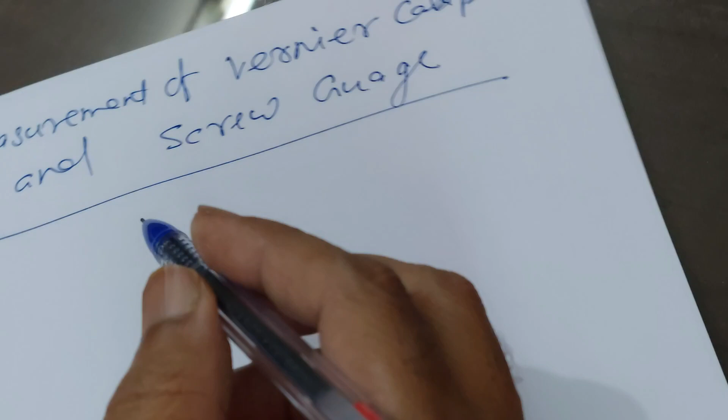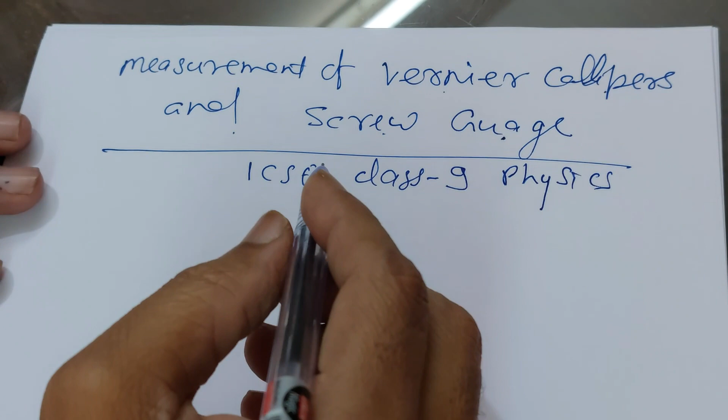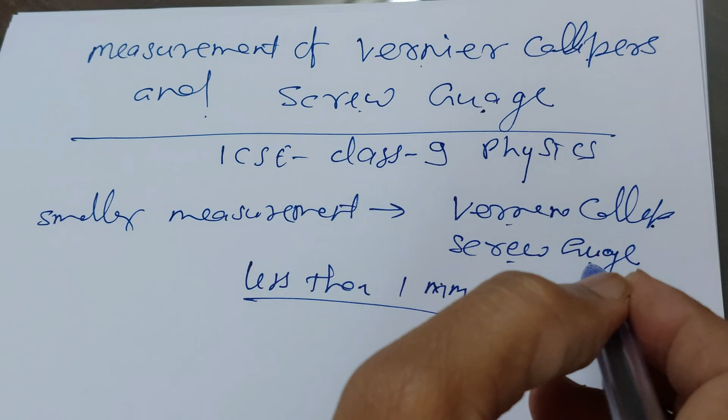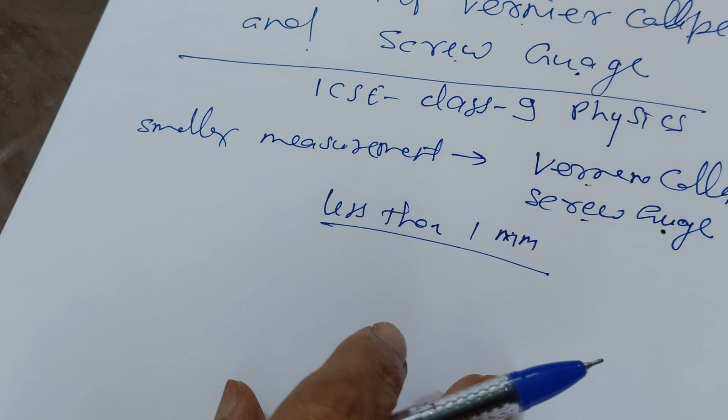Today the topic is measurement using vernier calipers and screw gauge for ICSE class 9 physics, chapter first. We know that we can only measure long distances with simple devices. To find out smaller measurements, we need devices known as vernier calipers and screw gauge. These are two devices to find out measurements smaller than 1 millimeter. So the smallest value can be determined by the vernier calipers and screw gauge, and the larger value can be determined by simple meter, hectometer, kilometer and so on. So first we start with vernier calipers, and the second topic is the screw gauge.

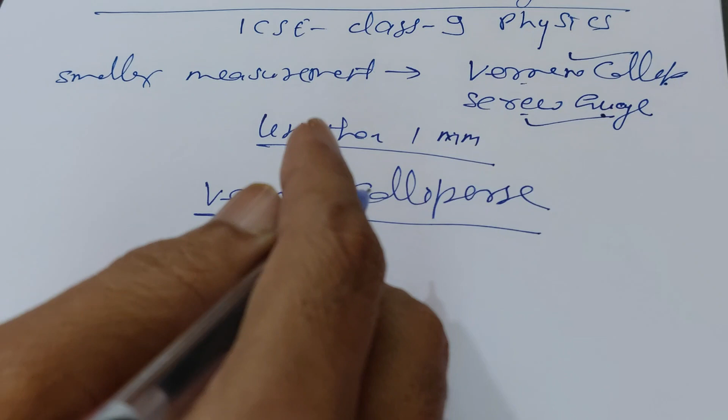The first topic, vernier calipers. Vernier calipers is a device to measure the value of smaller length, and the device is very simple. First of all, to know about the vernier calipers, you should know about its structure.

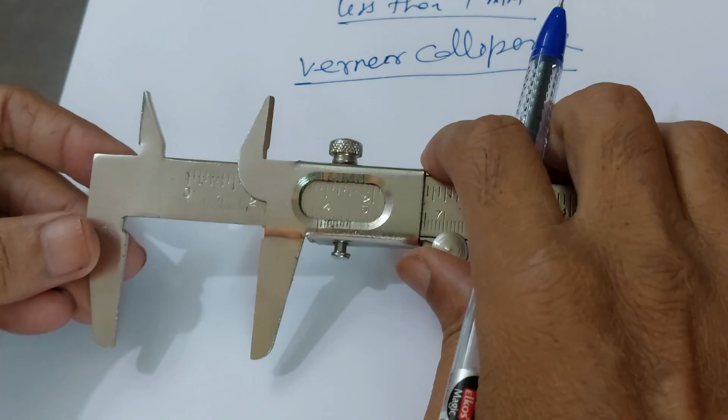This is the vernier calipers, and this is the fixed jaw. You cannot move it, and this is the movable jaw. You can move it up and down. This is the inside jaw, and this is the outside jaw, in which this jaw is fixed and this is movable.

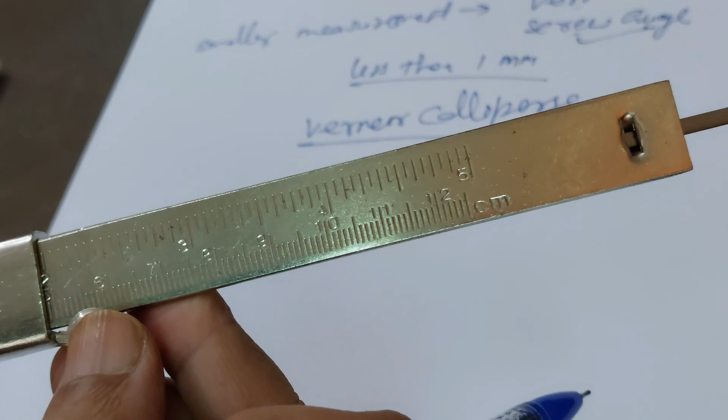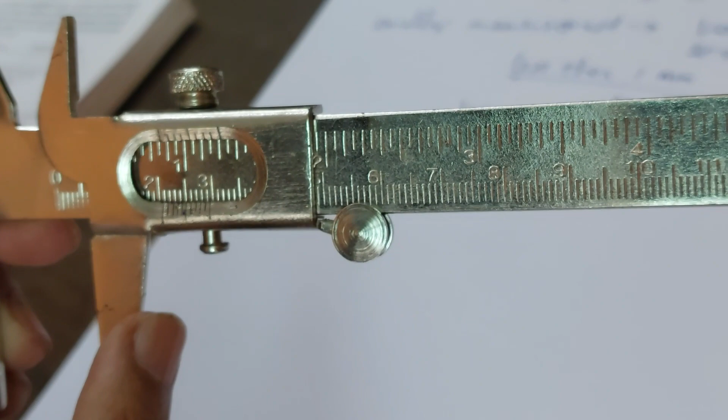This is the main scale. There is a reading given on the main scale: 1, 2, 3, 4, 5, and this is the vernier scale. The vernier scale also has a reading: 1, 2, 3, 4, 5. So we have the main scale, vernier scale, and the jaws. This is the inside jaw, this is the outside jaw, this is the fixed jaw, and this is the movable jaw.

Now, how can you calculate the measurement of any material? First of all, to calculate, we should find out the least count. What is the least count?

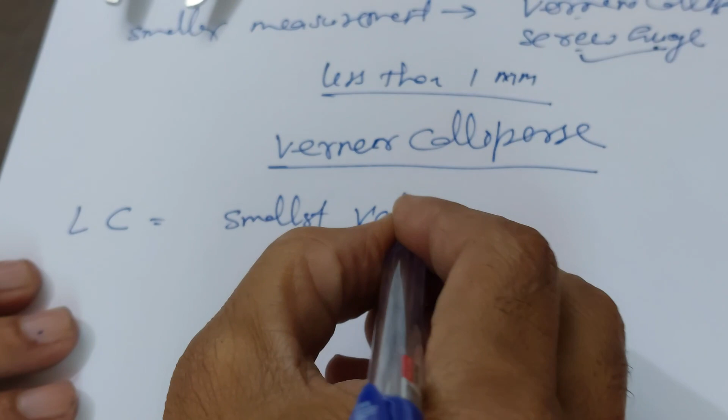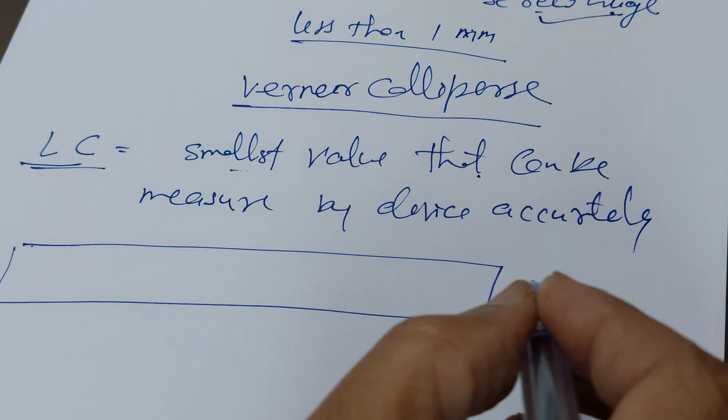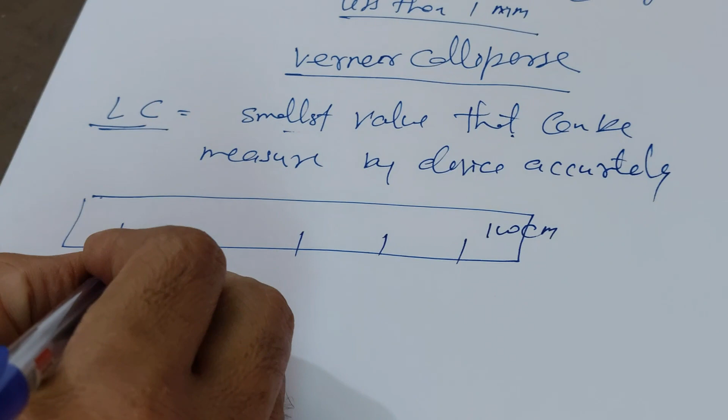The least count is the smallest value that can be measured by a device accurately. You know that in your meter inch tape, the smallest value is 1 centimeter, 2 centimeter, 3, 4, 5 and so on, up to 100 centimeter. And you can measure the smallest value of only 1 mm, because it has only divisions from 1 to 2 within a 1 centimeter gap. There are 10 divisions, and you can only accurately measure 1 mm.

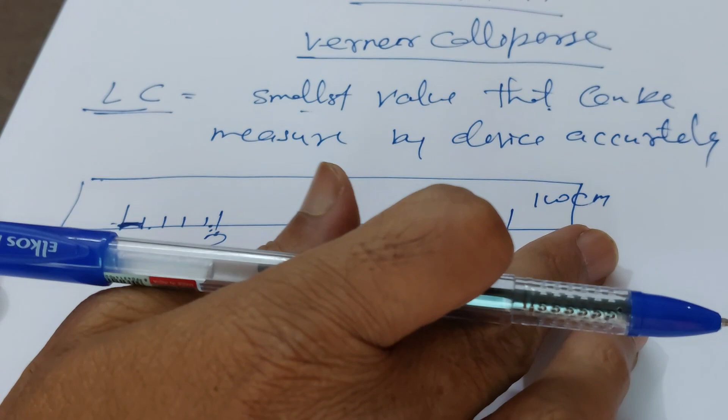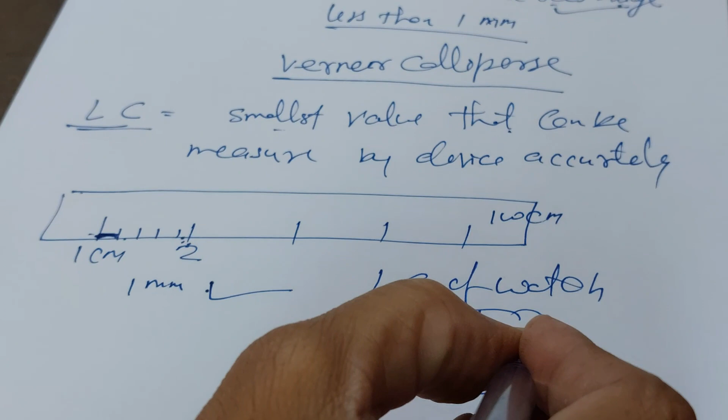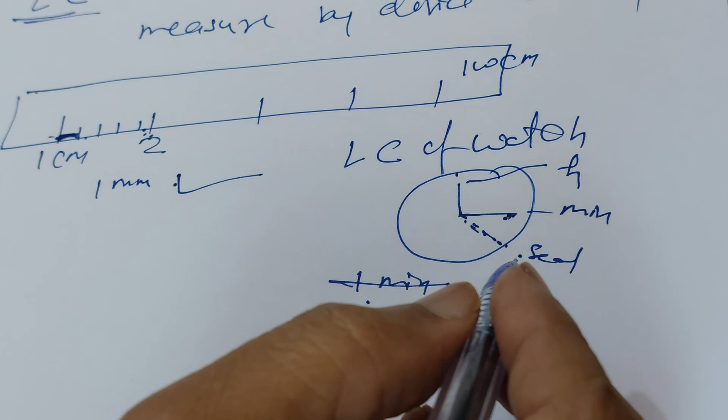So the least count of the meter scale, which is generally used in tailor shops, is 1 mm. The least count of a watch, if it only shows hour and minute, is 1 minute, because you can only measure the value of 1 minute. But if there is an hour handle, minute handle, and second handle, then the least count is not 1 minute, the least count is 1 second, because you can easily and correctly calculate the value of 1 second.

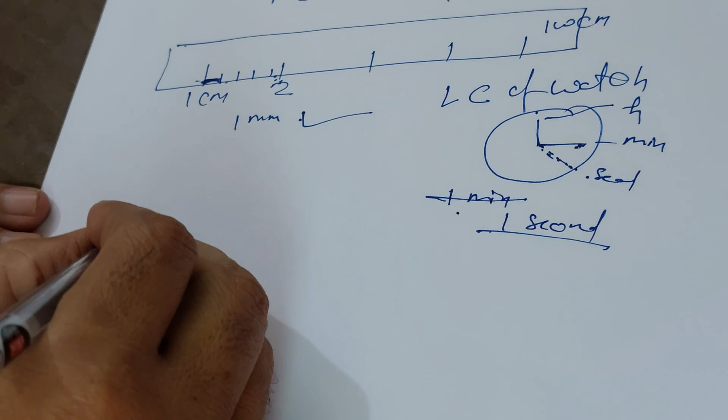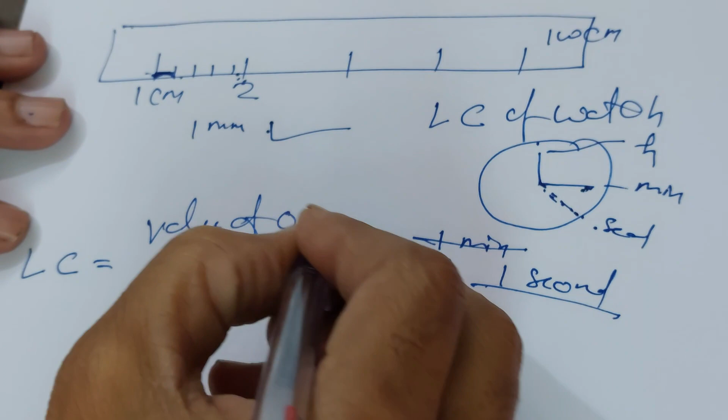In case of vernier calipers, the least count can be calculated by a simple formula: the value of one main scale division upon the number of divisions in the vernier scale. It means the value of one division in the main scale, which is calibrated in mm.

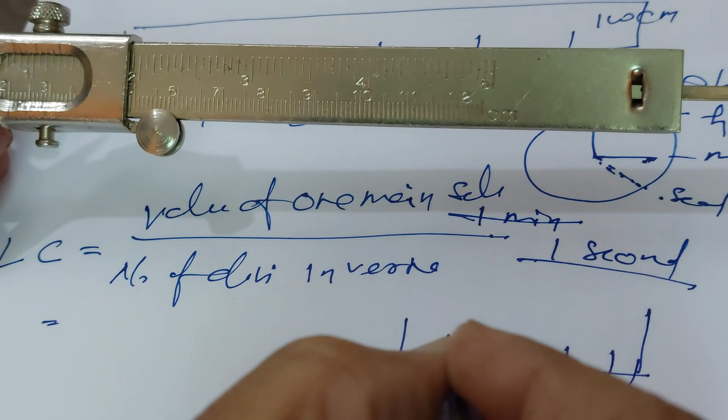After 10 mm comes 1 centimeter, and this centimeter value is divided into 10 parts, and one part is equal to 1 mm. So the main scale value, the value of one division of the main scale, is 1 mm upon the number of divisions in the vernier.

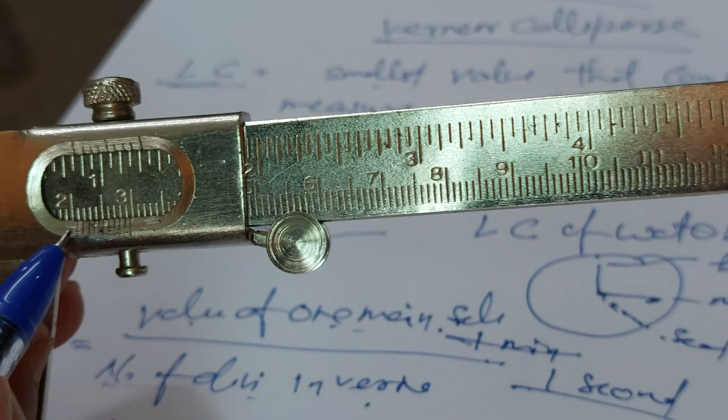This is the vernier, and there are 10 divisions: 1, 2, 3, 4, 5, 6, 7, 8, 9, 10. Dividing by 10 gives 0.1 mm, which is the least count that you can correctly measure, or 0.1 upon 10 centimeter, which is equal to 0.01 centimeter.

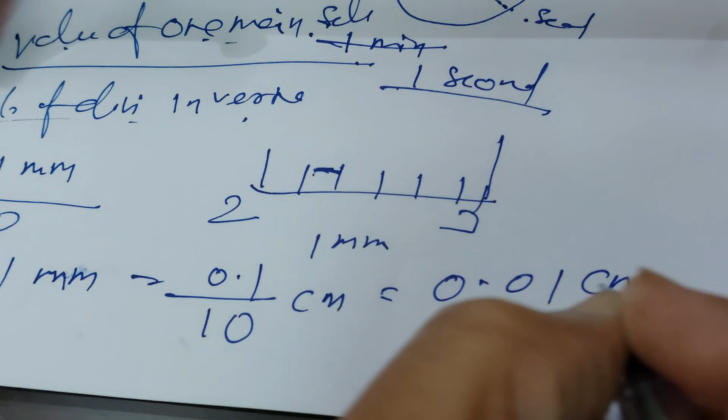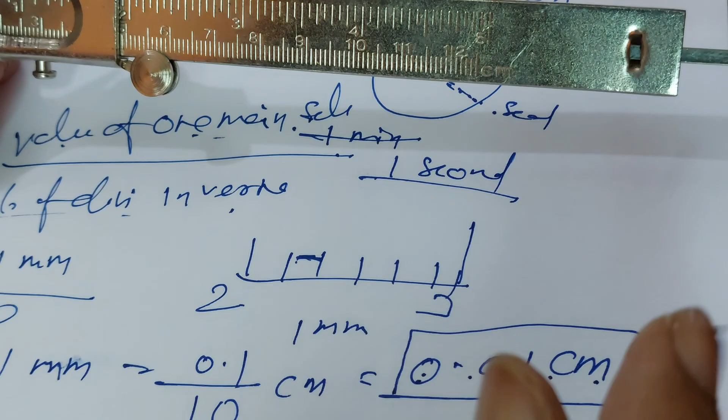You can measure the correct value equal to 0.01 centimeter, up to 0.01 centimeter, because one value of main mm and this one value of mm is divided into 10 values of vernier.

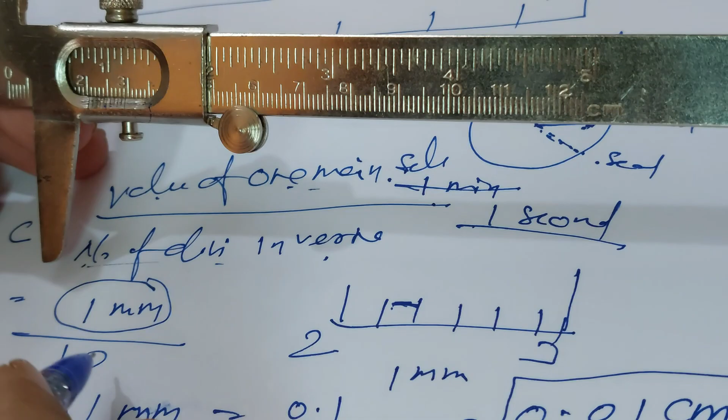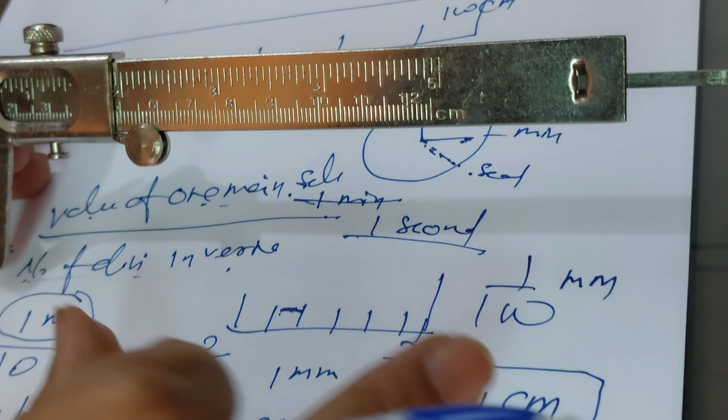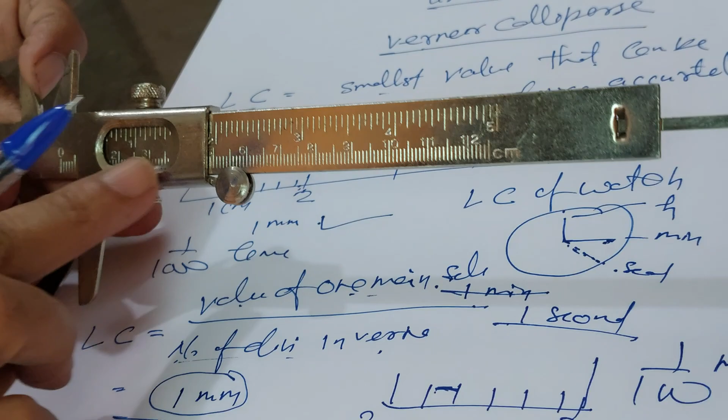So you can easily calculate the one value of mm by dividing by 10 values of vernier. If there were 100 values, then you can get 1 upon 100 times accuracy. If there were 1000 divisions in vernier, then you can calculate 1 upon 1000 times the smallest value. If there are 10,000 divisions in vernier, then you can calculate 1 upon 10,000 value.

So the least count should be calculated first. The least count has been calculated. You should first find out the least count to get the measurement, and you know that the value of one division in main upon number of divisions in vernier.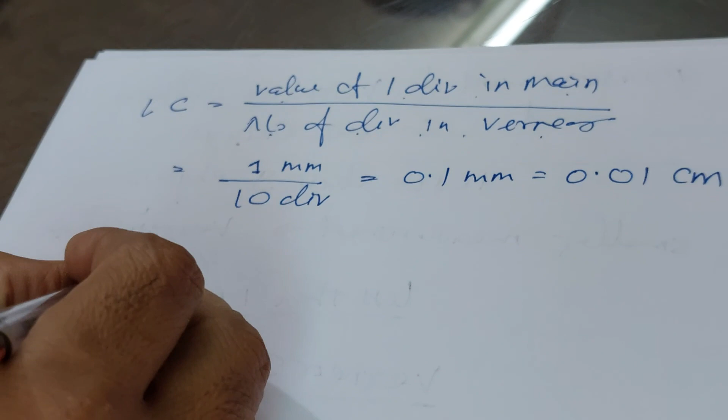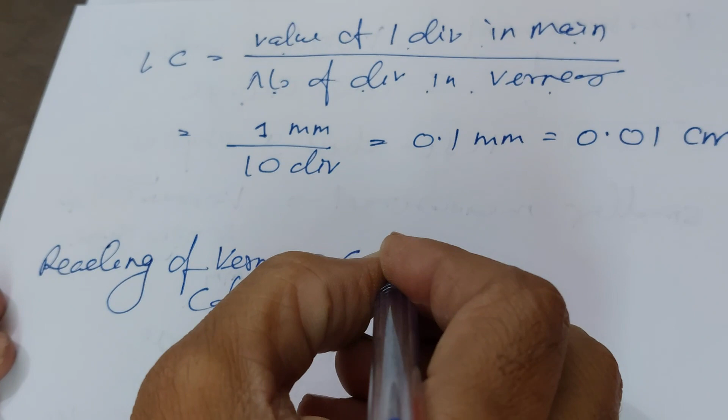The reading of vernier calipers is equal to coincide value into least count plus main scale reading. It means you should multiply the least count by the value of coincide plus the main scale reading.

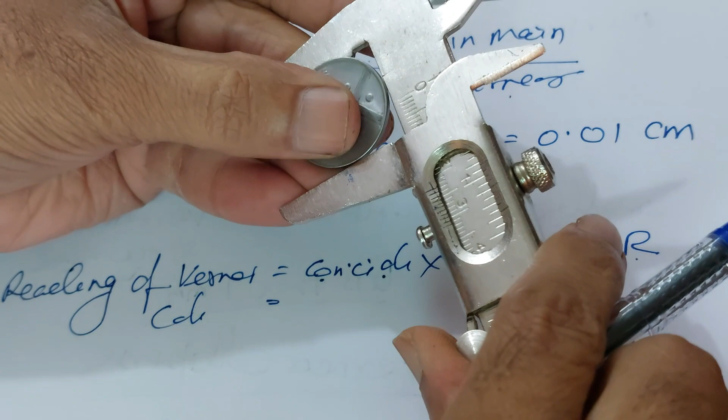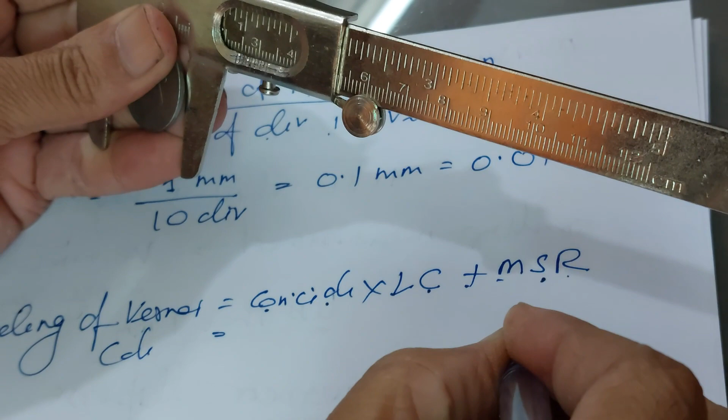If you measure the value of any coin, then you should first find out the value of main scale. The value of main scale is 1.2 centimeter, and the least count you have calculated of this device is 0.01, because the least count has been calculated.

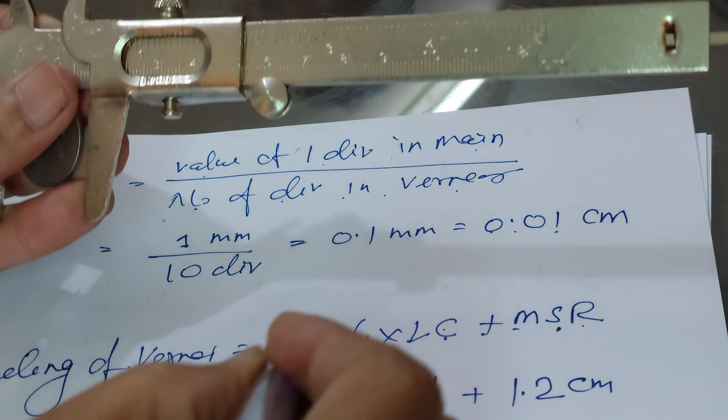And the coincide value, it means which value of vernier is just in front of the main value. First is in front? No. Second is in front? No. Third is in front. The third value of vernier is just matching to the main scale.

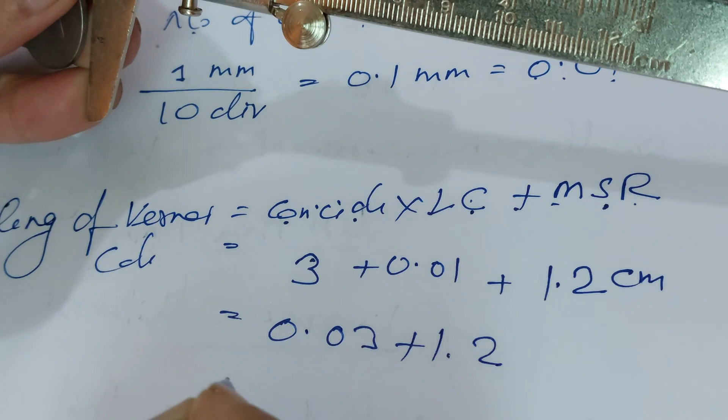So the 0.03 plus 1.2, and the true reading is 1.23. That is the reading. You can calculate it very easily.

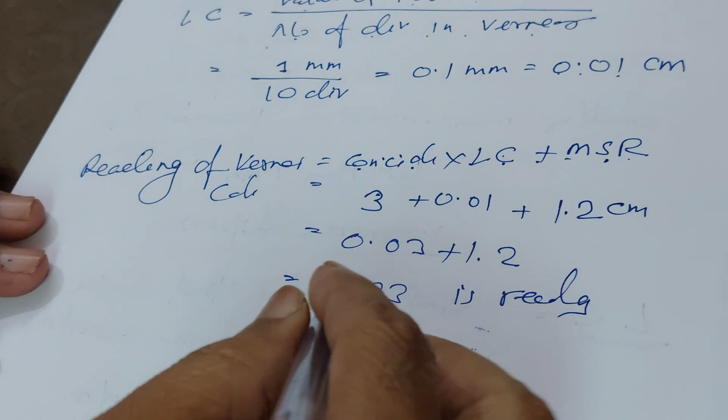Let us find out the reading of this vernier. The rod is fixed, and the reading can be observed by coincide value into least count plus main scale reading.

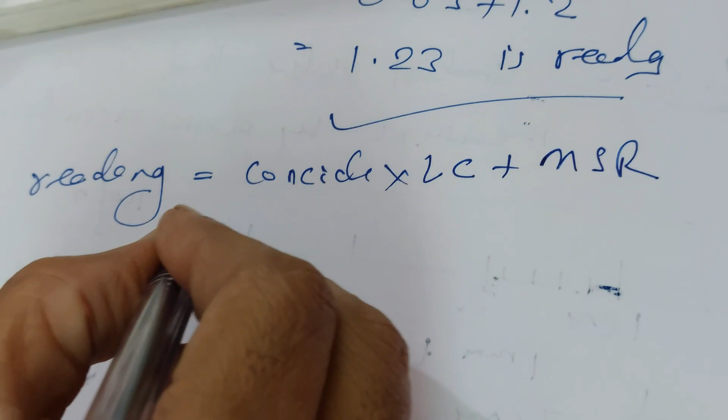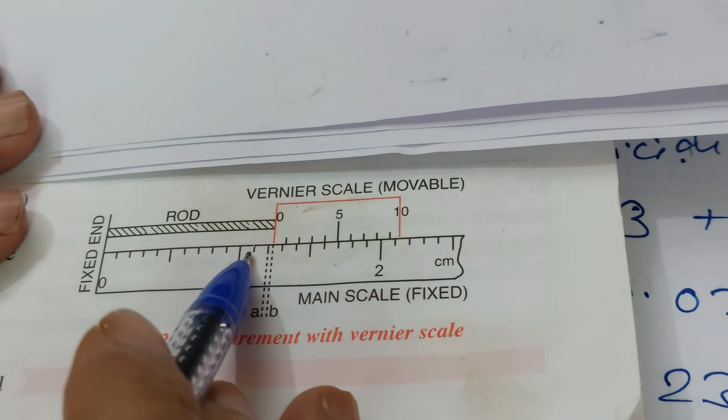The least count of the vernier caliper is 0.01, and the main scale reading in the figure: the main scale is 1, after completing 1, 1.1 and 1.2 and 1.3. No, not 1.3. Between 1.2 and 1.3, you should take the value 1.2 centimeter.

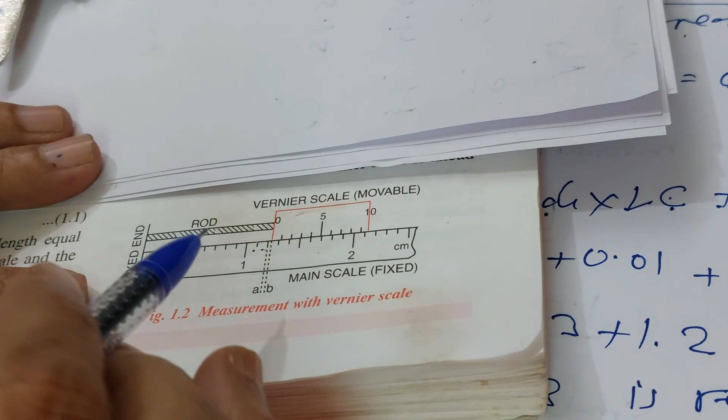The main scale reading is 1.2 centimeter, and the coincide value in the image: which value of vernier is just in front of the main scale? The first, not just in front. Second, not just in front. Third, not. Fourth, not. The fifth value of vernier is just matching to the main scale value.

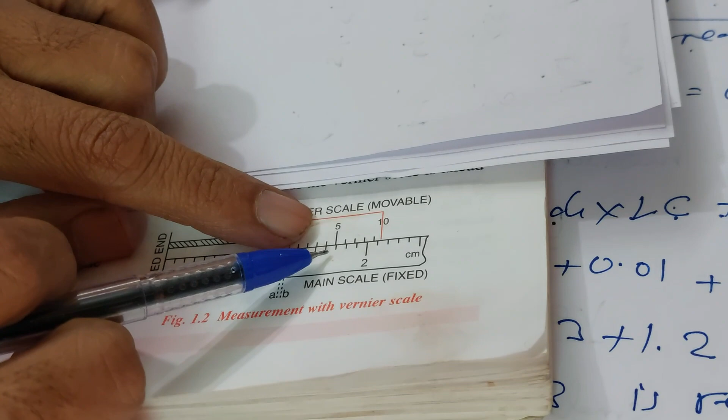So the value is 5. The value is 0.05 plus 1.2 is equal to 1.25, which is the correct reading. Sometimes it has error.

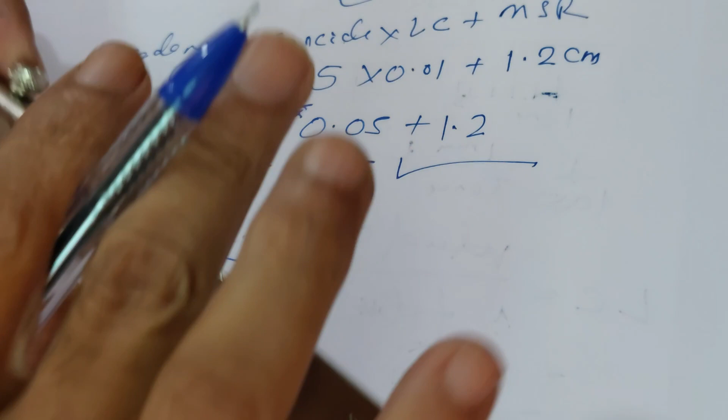If the device is old, and if you fix all the jaws, the value of vernier 0 should be in front of the value of 0 of main scale. If it is not, then it has 0 error. It has the 0 error.

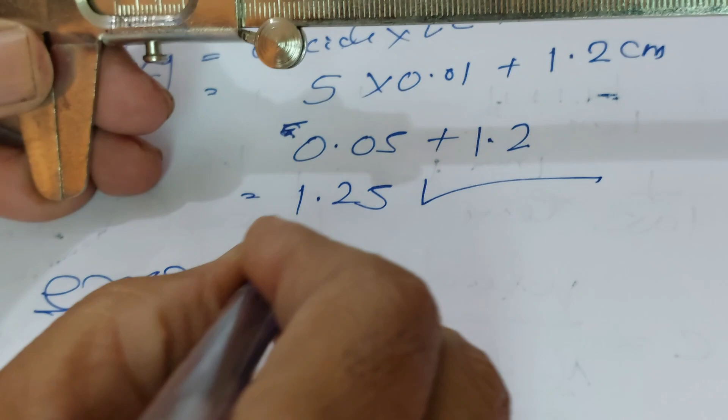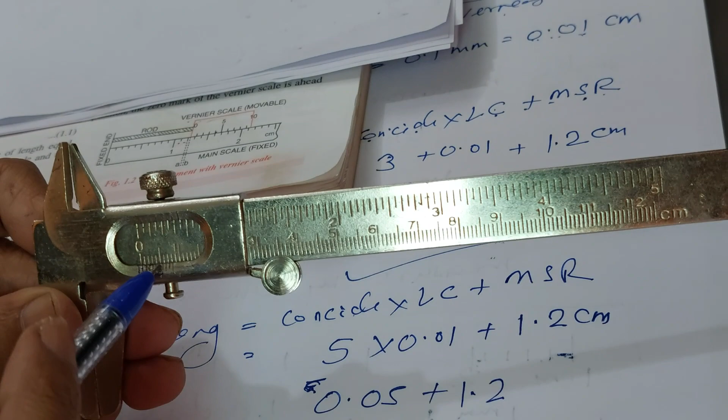Zero error is of 2 types, positive and negative. What is positive? If you close these jaws and the vernier scale 0 is just right side to the main scale, then it is positive.

Here, after joining the jaws, the vernier scale 0 is not in front of the main scale 0, so it is the positive 0 error.

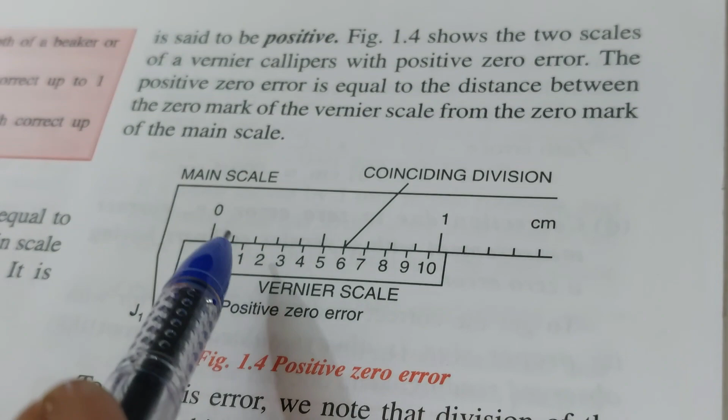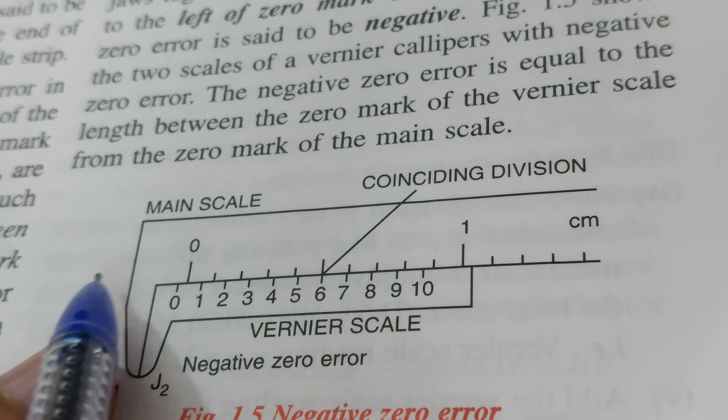While negative 0 error: if this 0 is on the left side of the main scale, this is known as negative 0 error, because the 0 of vernier is left side to the main scale. So you should first find out the 0 error.

The 0 error can be calculated by coincide value into least count. If the third value or fourth value or fifth value of vernier is in front of the main scale value, and the least count is 0.01, then the 0 error is 0.03.

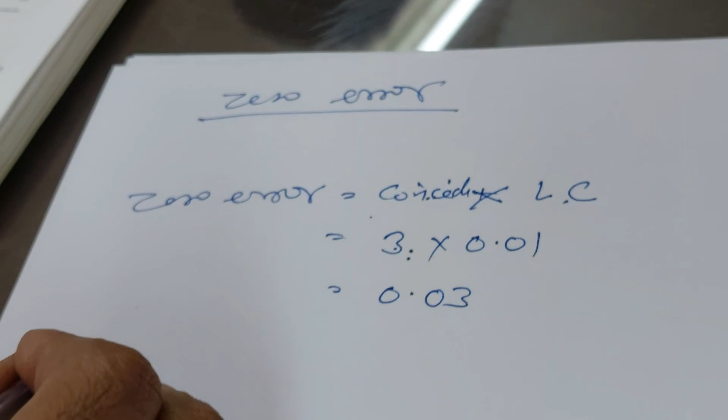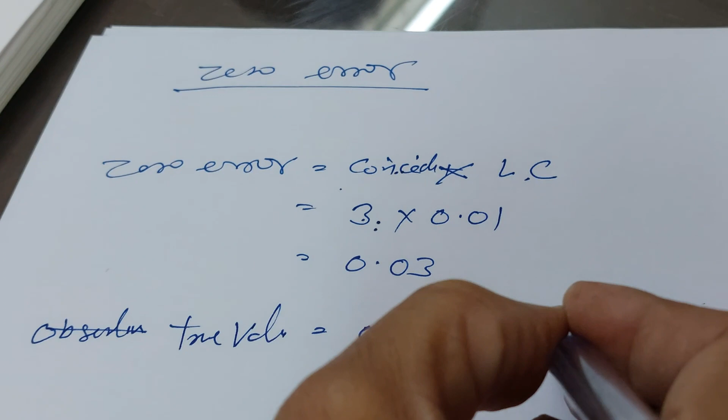The true value of reading is equal to observed value minus error, with sign.

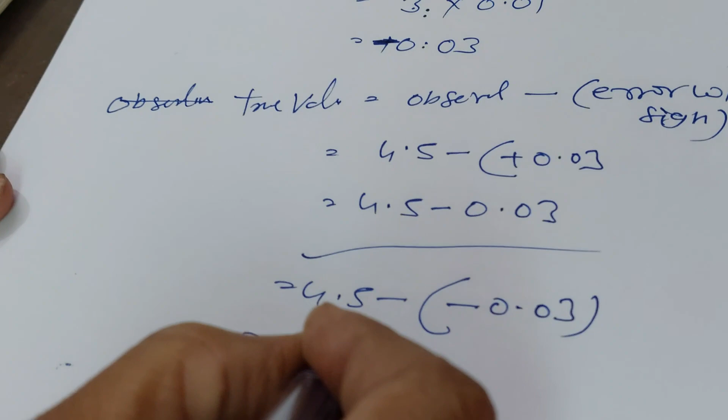If the observed value is 4.5 minus, and this is the positive zero error, so plus 0.03, and thus 0.03 and subtract, this is the value. And if there was minus zero error, then 4.5 minus minus 0.03 is equal to 4.5 plus 0.03 is the value.

The screw gauge is another device which you can measure up to 0.0001 centimeter. You can measure the value. It is the smaller value that can be calculated than vernier caliper.

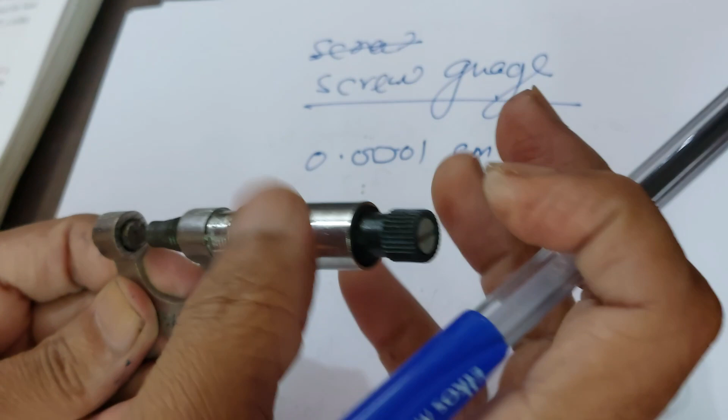The structure of screw gauge is this, and this is the screw gauge, and this is known as the stud. And this is the screw, and this is the spindle. And it has the main scale. Where is the main scale? This is the main scale. Yes, this is the main scale.

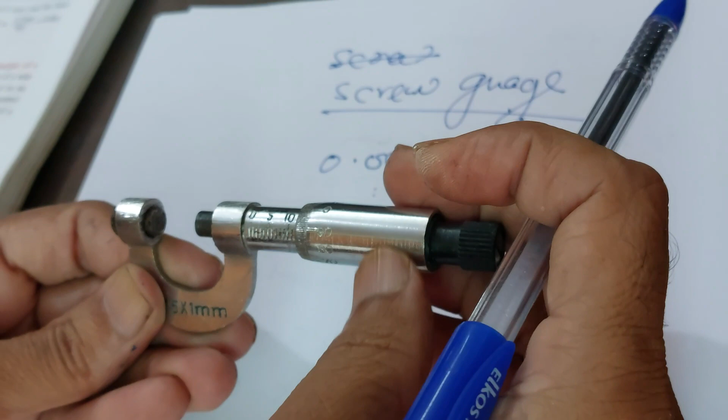And this is the circular scale. It is the circular scale. And if you move up and down, then it moves on the main scale. The circular scale moves up and down on the main scale.

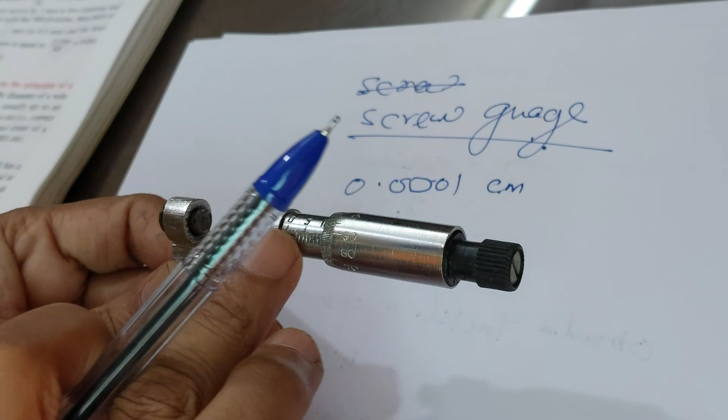So first of all, you should find out the least count of the device. The least count of the device is the value of one division in the main scale, divided by the number of divisions in the circular scale.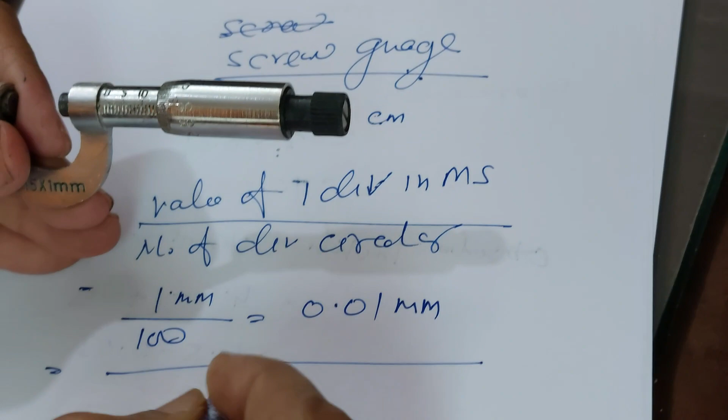It means the value of 1 in the main scale is divided into 100 parts, so you can measure accurately 1 upon 100 times accurately. If the value is divided into 10, and there are 10 circular divisions, then only you can find out the 1 upon 10th part of the value. And if there is 100, then you can find out the 1 upon 100th part.

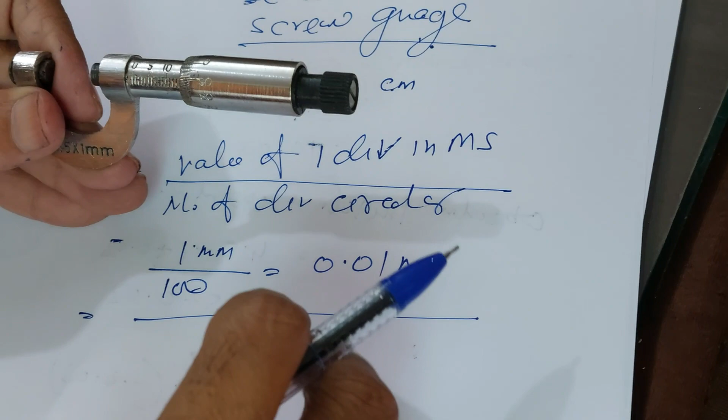More smaller values can be measured accurately. If there were 1000 divisions in the circular scale, then one value can be divided into 1000 times, and more less value can be observed, can be measured accurately.

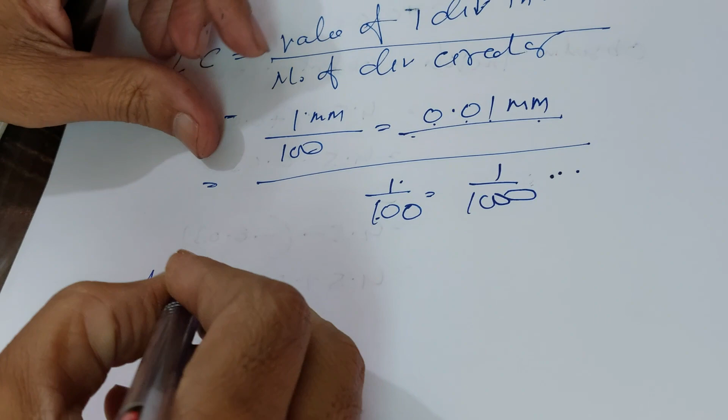So first of all, the least count of this screw gauge is 0.01. How can you measure? The measurement is equal to least count into circular scale reading plus main scale reading. Least count plus main scale reading.

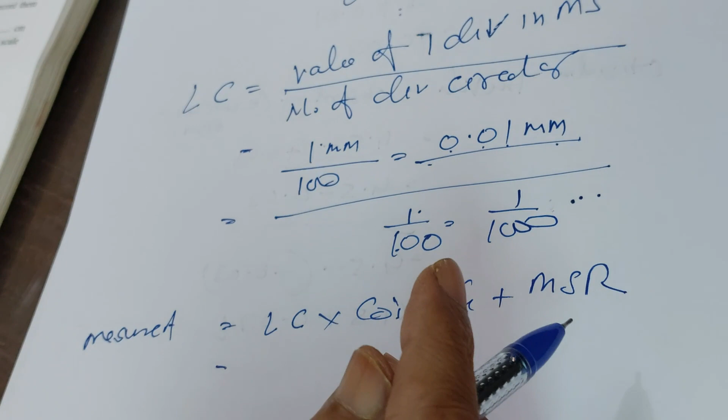If you should find out, the least count is known, and the circular scale reading and MSR should be found out.

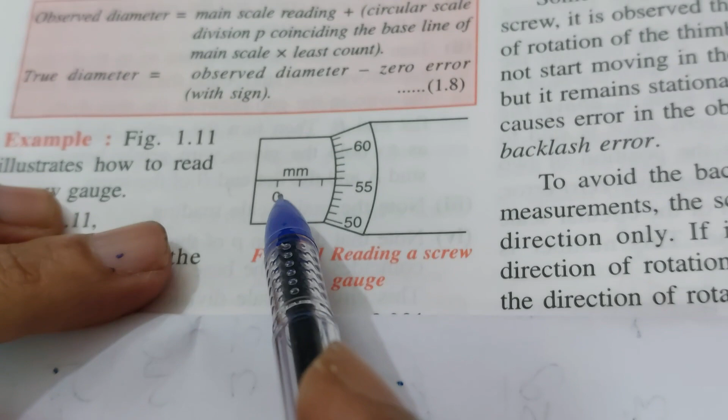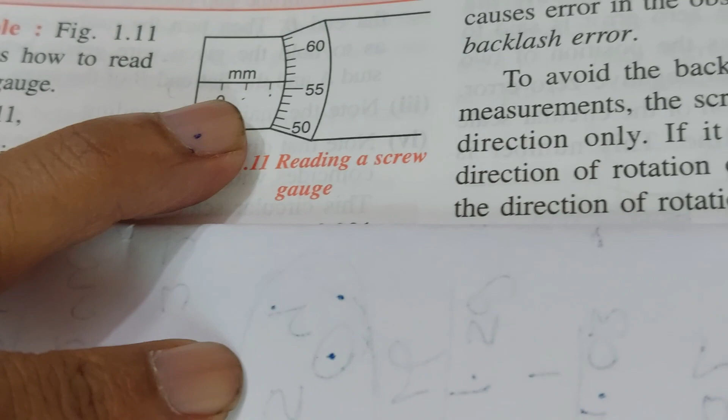If this is the reading of the screw gauge, the main scale reading is 0, 1 and 2. It means between 2 to 3, 0, 1 and 2. So the main scale reading is 2. So the main scale reading is 2 mm.

And for the circular scale reading, the value on the circular scale which is just in front of the main scale line: is it 50? No. 55? No. The 56 value is just in front of the main scale value. So 56 is the circular scale reading, because 55 is just lower than the main scale line and 57 is upper than the main scale line. So the 56 value and the least count is given.

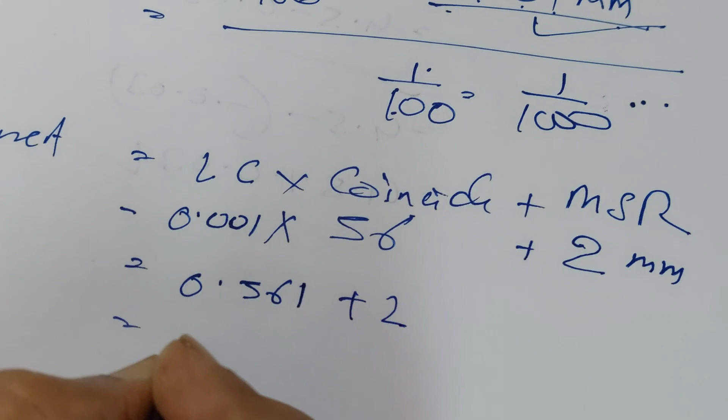The least count is 0.001. So multiplying, 0.561 plus 2 is equal to 2.561 mm, which is the correct reading.

Perhaps you have understood all the topics of vernier calipers and screw gauge. If you have any doubt, please comment.